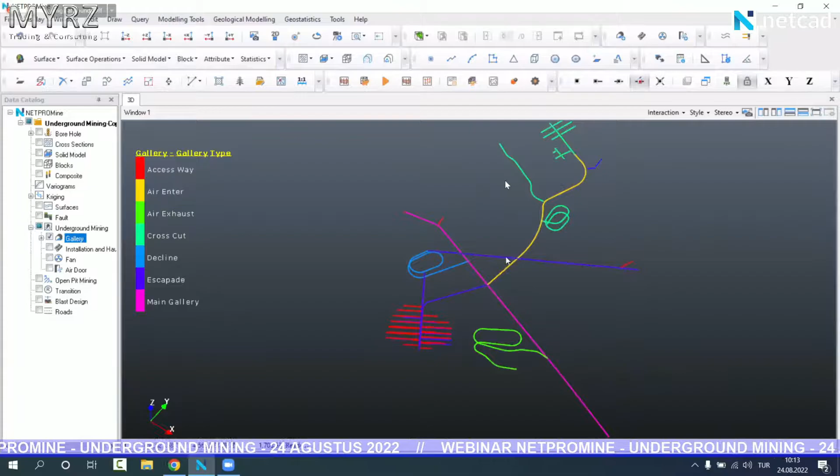So with the operations that we do today, basically we are going to create our own project, and then we are going to design an underground project. To start with, again, without anything, I just need to create an empty project file. I'm selecting my file. So it's going to be underground mining for webinar, or something like that. So I'm saving.

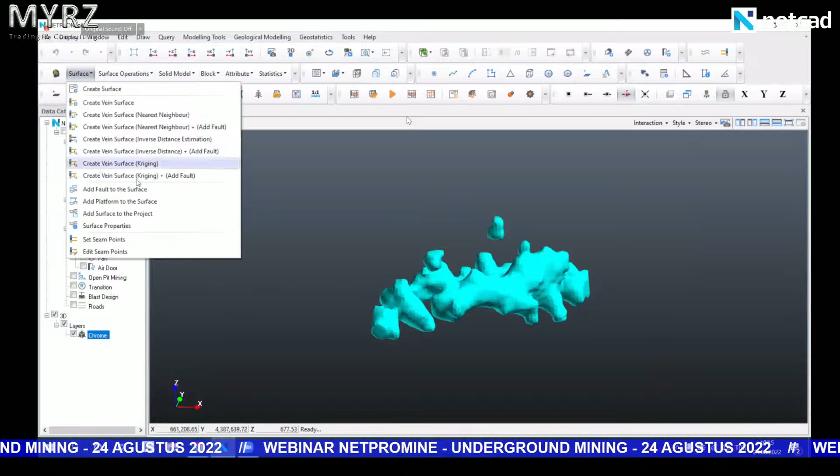Basically, you don't need to import any drillings, but maybe you can import a solid model if you're going to design on it. But underground mining actually works differently than the others. First of all, I'm just going to load one model here. Okay, so let's say this is our geological model. And I'm adding that geological model to the project as a solid model. So this is my solid model.

Because it's a chrome model, I'm just going to change the color. Maybe I can also see the borders, etc. And then I'm going to need a surface. I can also add the surface in here. And I can take that surface to the project.

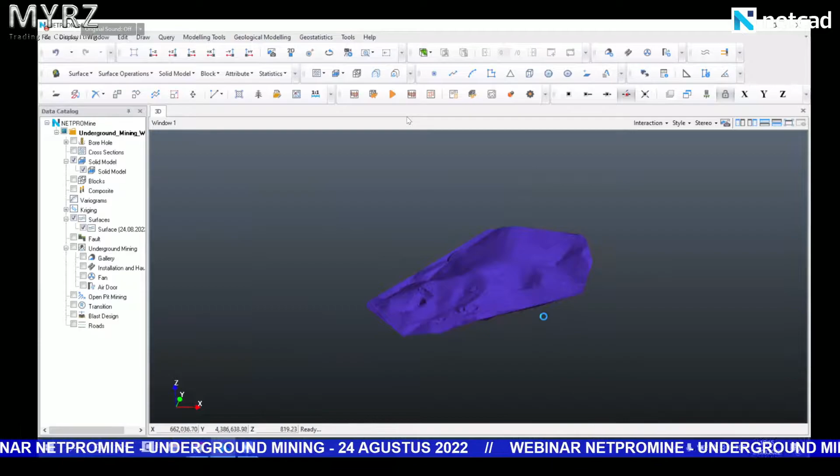In this part, those files could be DWG files. Surface, we can import the surface from an Excel file. We only need the points, X, Y, Z coordinates of the surface. And once we import it, we can work on our project on that.

So there are a couple of designs that I would like to mention in this webinar, because while we are designing underground mining, it's going to be more likely the lines. So we are going to work with the lines, and then those lines will become underground galleries. To start off with, maybe not from the surface, although I can make it a block model too, but I think that is not necessary at the moment.

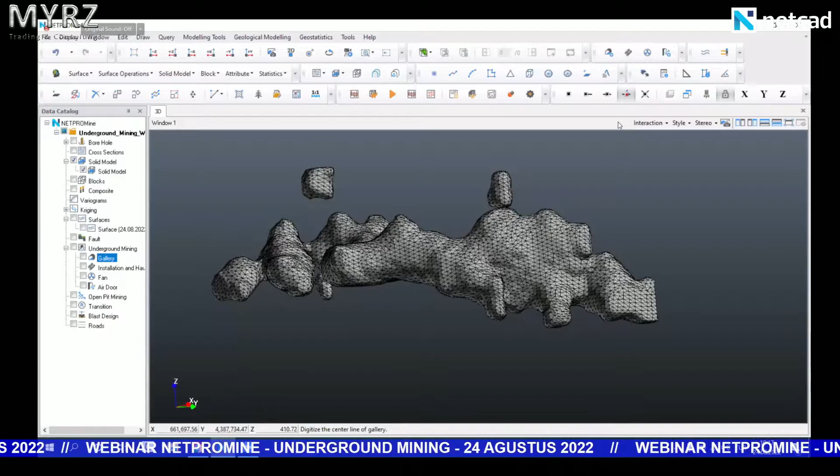To add a gallery, we simply right click, and from the list that opens, I'm selecting add gallery here. And now I can start drawing. In NETPROMine, there are snapping features, so it depends on where I would like to start. It could be a surface as well. So if I'm going to start the design from the surface, then I have to select the closest object and click some point on the surface.

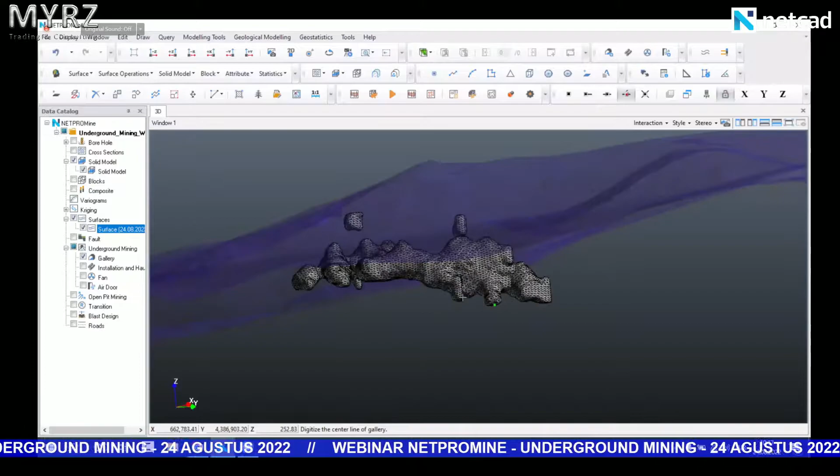But if I'm going to do another type of design, let's say I would like to draw my first gallery from the bottom of the model to the surface. So I'm selecting the bottom of the ore surface, and then the location on the surface, so the model and the surface. I just create one gallery.

To finalize it, I just need to right click. When we right click, we need to put some information about all the galleries. So it's going to be a lot of galleries in this webinar, that's why I'm just going to name it as G1, Gallery 1, Gallery 2. Or if it's going to be a curve, I'm going to name it as Curve 1 or Spiral S1.

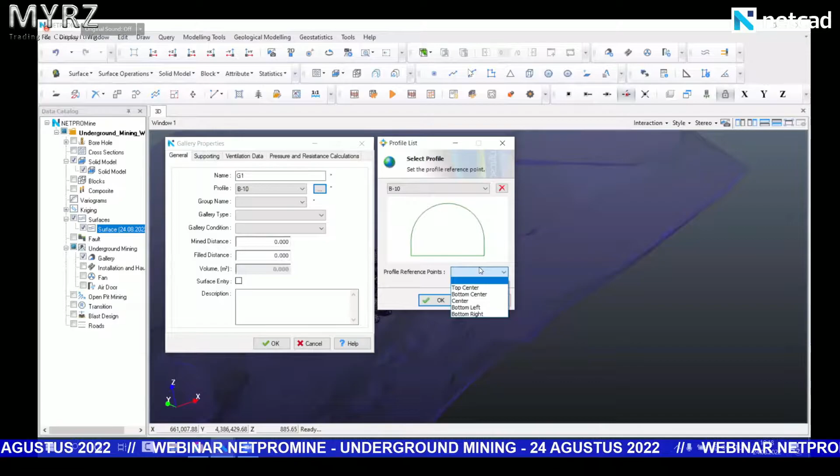And then the profiles. I need to select one gallery profile. I'm clicking the ellipsis button here, and there's a profile list. You can check all the gallery profiles, and you can select which one suits your project as well. And then there will be a profile reference points, so when we draw that line, where this profile will stand.

If I select, for instance, bottom center, my line will go through that point, and my gallery profile will be located on top of the line. So this is a reference point that we can decide, or it could be the geometric center of the gallery profile. But I would like to stick with the bottom center point.

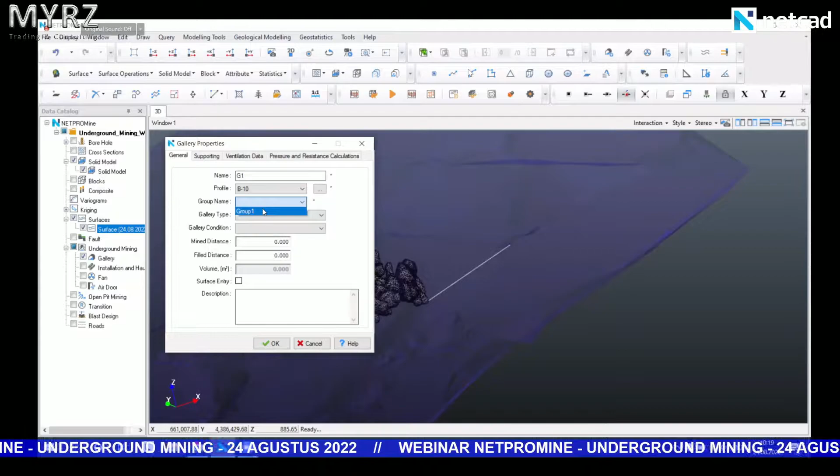When I click OK, I move on with a group name. You can create different gallery groups if necessary. We didn't create any other group than the default, that's why I'm capable of selecting only group 1.

As a gallery type, there's lots of options: main gallery, the haulage way, access way, air enter, air exhaust. There's lots of options. So I'm just going to select the main gallery here.

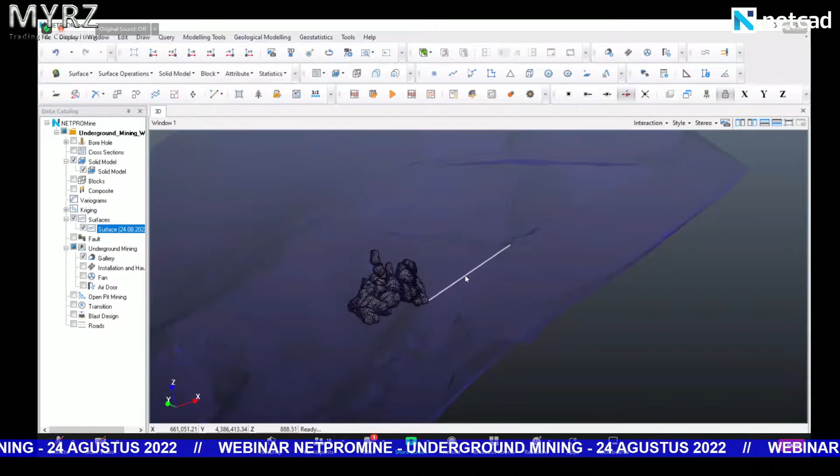And as a gallery condition, I can select planned, operated, mined, or filled. It's all the information about the gallery. And if it's mined or filled, then I can put the distance, so how many meters it's mined or filled. It's also additional information that we can add. Once we click it, now the line becomes a little bit bolder, but still we are not able to see the gallery profile on it. This still looks like a line.

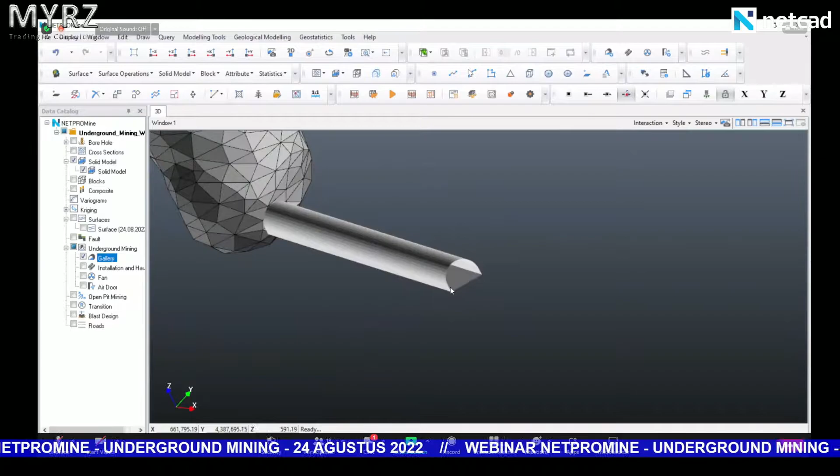To see the gallery profile, we need to right click on the gallery and uncheck that display center line. By default it's checked, so if we uncheck it, instead of a center line we'll be able to see the gallery profile. As you can see, our gallery is created with its profile on it.

This is the first thing while we are designing the gallery. If you are going to design around the ore, basically it has to be that way, but in this sample I will also use other techniques, so I'm not going to stick with the ore points. If you are going to use the ore body and build your gallery system around it, then we can use the snapping points, the surface, the geological model.

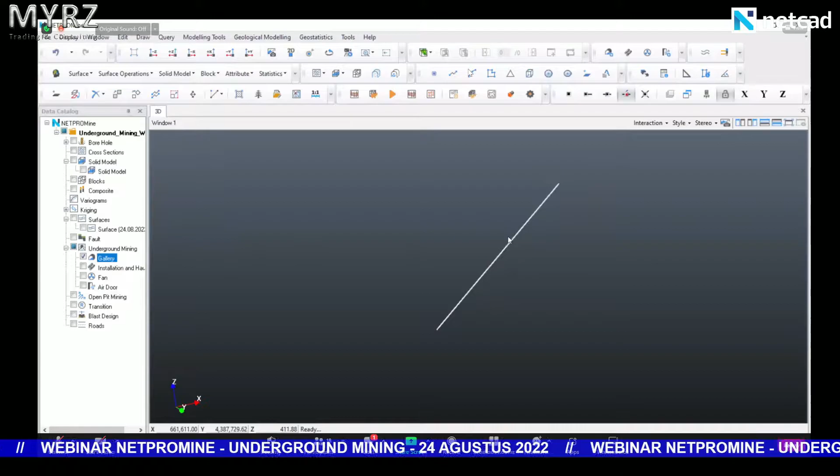Or if you would like to make a free design, let's say we select the starting point and later on we would like to move freely. I'm just turning that gallery profile back to display center, and then to add a gallery I'm clicking here. If I'm going to continue from this point, then I must catch that point. But if I would like to do some free design, I can catch the last point of my previous gallery and click the space button on my computer, or click the coordinate selector window. Both are basically the same thing.

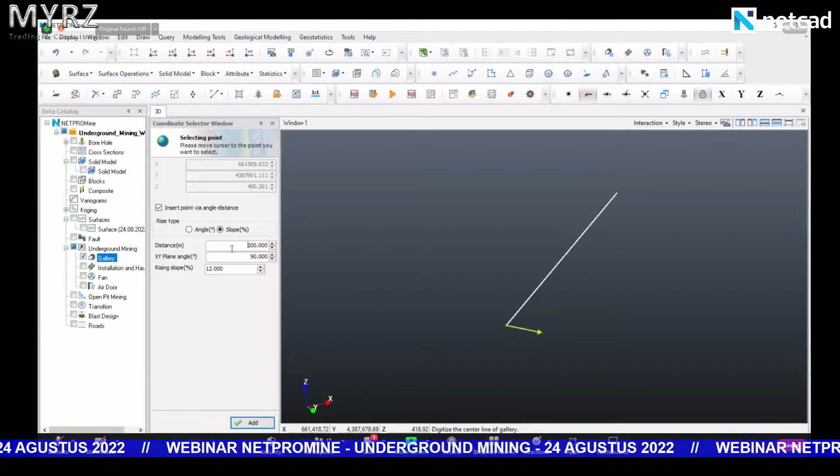With some parameter entries, we can create the gallery direction, how long this gallery will go through, and the angles. For instance, there are some parameters already on it. I'm just going to display that. So the distance, how long my gallery will be, and the XY plane angle is basically the angle I have in 2D dimension.

2 dimension. So instead of 90, if I select 180, it will go left side. If I select 0, it will go right side. So 360 degrees we have, and we can manipulate that line drawing with those features. I think 90 was quite okay for my project.

And the rising slope, this is the amount of - it could be a percentage or the angle. So 12% slope we have in this design. If you're familiar with road design, basically we design the road with an 8% limit, so 8% is the maximum amount. If there's some limitation in the underground design, then you can put that number as well.

So let's say 7%. The distance is 100 meters. If I use 7% as a rising angle, then that means from the starting point to ending point we'll have a 7 meter elevation difference. This is the percentage one, but the angle one is different - angle will directly create a 7-degree angle, and my gallery profile will go through that. So rising slope could be different.

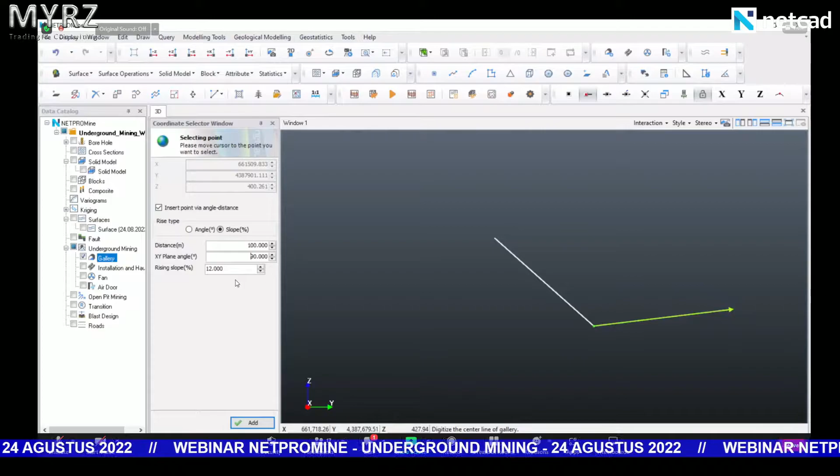If you would like to go the other side, then we can use minus 12 for example, and it will go down. This is the free design - after selecting one starting point, you can make your own design according to the criteria you define here. I'm just going to add that. Once I add it, it becomes white, and I did draw my gallery line.

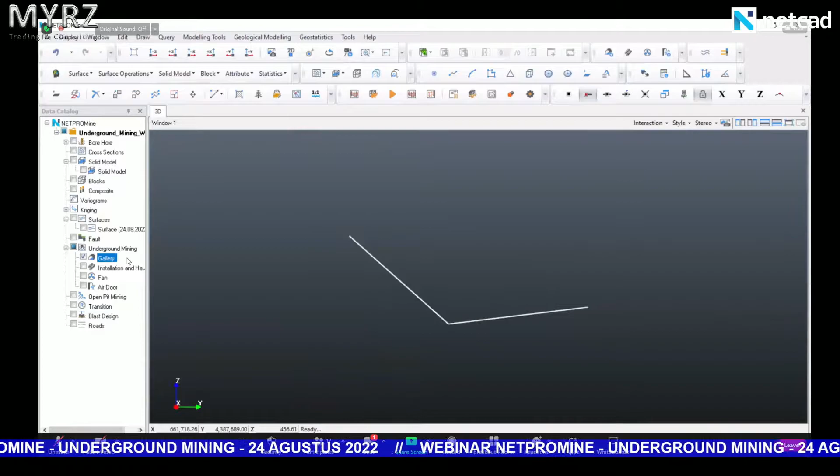With a right click I can complete creating this gallery. That's why we are going to put or draw lots of galleries. I'm just going to select the main gallery and the first ones that open. So quickly I select that information, and then when I display the center, I can see that my other gallery is also produced.

Basically it's a line drawing, so as long as you draw the lines according to your design there will be no issue. And also by using the coordinate system you can continue drawing the galleries. Let me also show you that. So I catch that point again to show me the first.

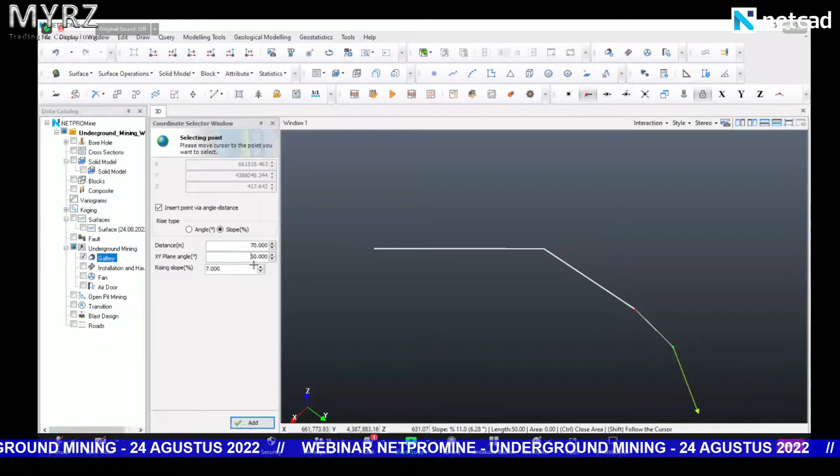So I can continue directly, or in this one maybe I can change the XY plane angle, like 80 degrees, or the rising slope, 11%. The distance could be 50 meters. So I change the parameters and add it. I can continue adding other galleries - now distance going to be 70, XY plane angle will be 60, and the rising slope let's say 7% again, and adding.

So I add two different lines that have different directions, different distances, and different plane angles. When I right click, I will use those two broken lines, or one polyline as we can also call it, and create a gallery profile as well.

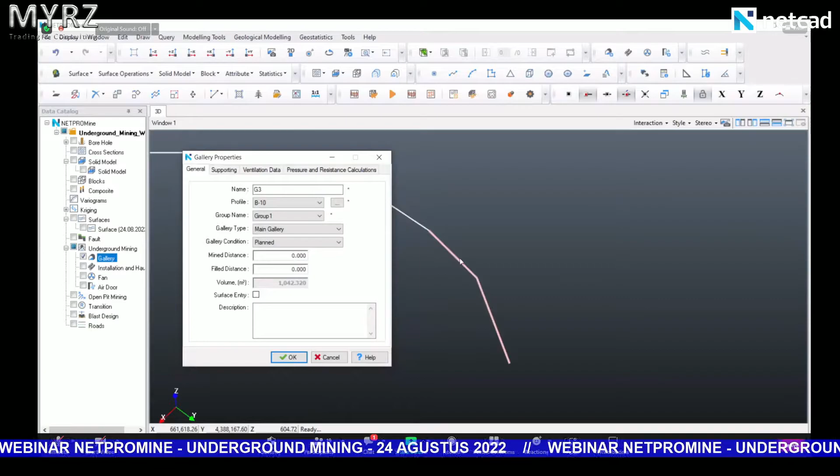So this one is going to be my third gallery. If I check its object properties, as you can see, the highlighted one is the broken line as a gallery. That was basically a free design. So if you would like to design freely around the geological model by using the surface information, and if you would like to design your gallery in here, then you can use those free design options.

The second way of doing this, it's not going to be the same data or same location, I must say. I'll just delete those galleries. The other method is adding some reference points. So I do have a CSV file that contains some locations, XYZ locations. So I know now which coordinates I can use. And I do have the elevation information in here.

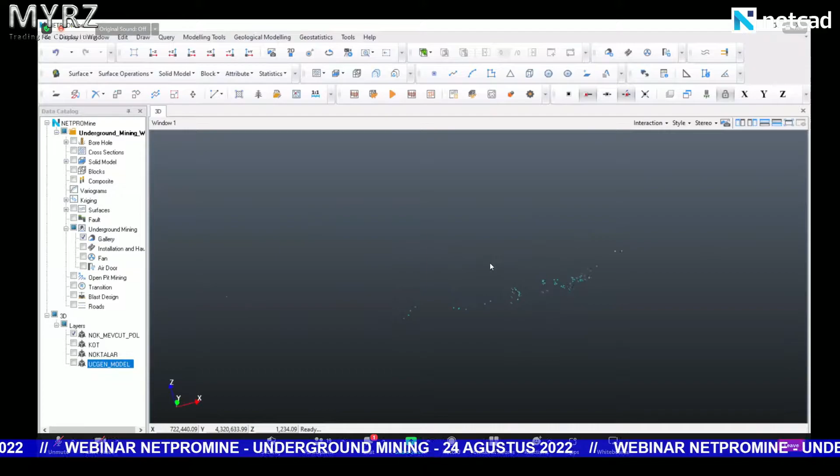By the way, that information could be either CSV, an Excel file, or a DWG file. It doesn't matter. I can also add some points by using the DWG file. So those are the points that I'm going to use, and I added the points as a DWG. But it is also possible to add files in CSV format. For that, I need to decide the layer name. I need to select the separator, and then, okay, so the second column is this one, the first one is X, and the third one is the Z column.

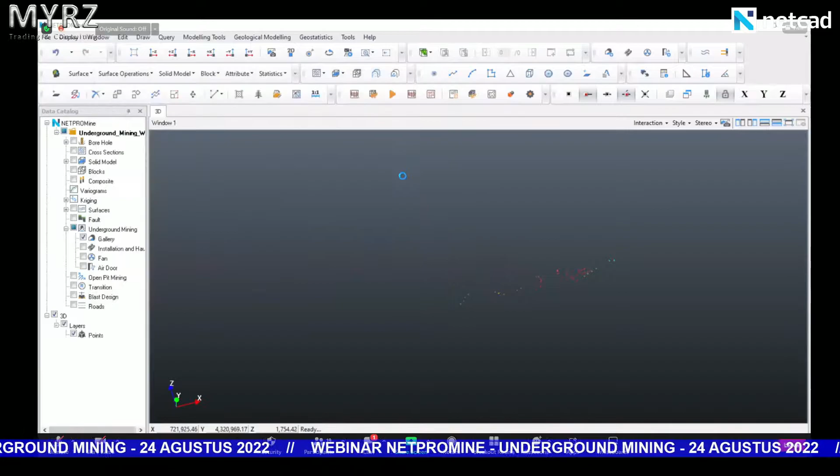When I complete it, I'm going to have all the points, and also I visualize the points or thematize the points according to their elevation information. One other thing that you can do with the points is basically label modes. So I select Z coordinate. When I click apply, I can select a label.

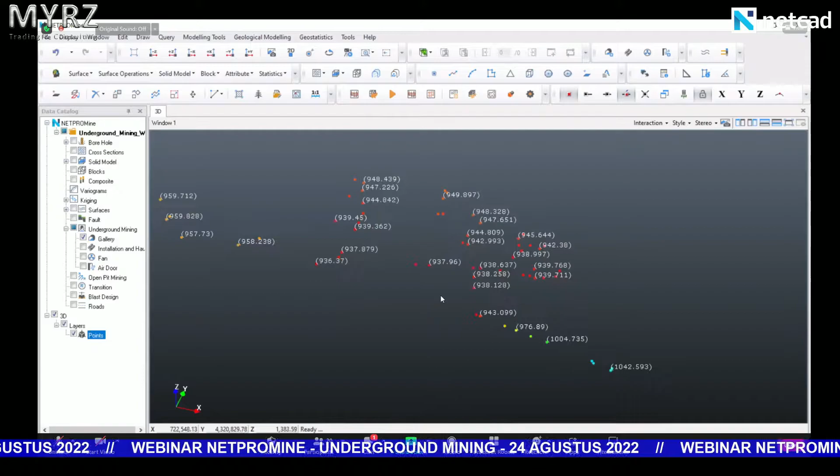Maybe the points are quite small for you to see. That's why I'm going to change their style from the advanced settings; I'm going to give some thickness to the points. So I think it's better now. And also, I'm capable of seeing their elevation information from the beginning with that. This is if I have the reference points. So this design will be according to the reference points. But the operation is quite the same. Reference points just help us to do the design even quicker.

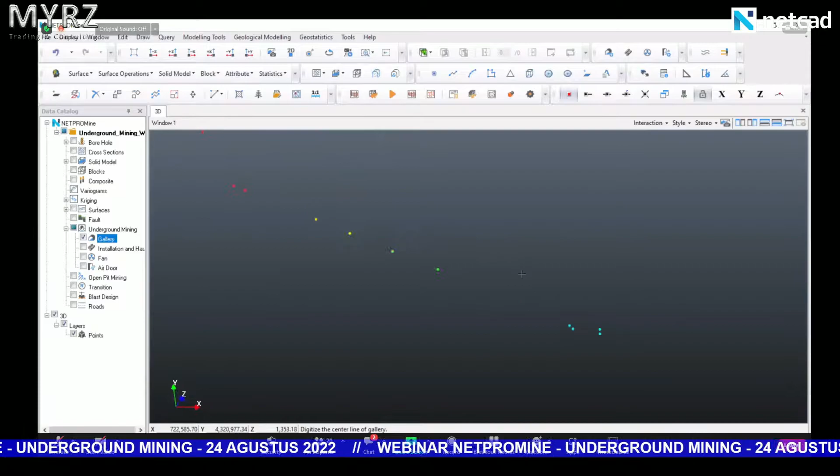From the gallery, I'm adding a gallery again. Because I'm going to select the points, as a snap feature I need to use the point snap, especially. I will skip some points. I'm not going to use them. So let's start from here. Okay, here to there. So this is one gallery. G1. Okay, I created my first gallery by using points.

And then I'm adding another gallery. So I'm capable of seeing its elevation as well. So slowly it's rising here. 38 and 43. There's a 5-meter difference between those points. If I would like to, I can also catch the point by unchecking the gallery and then catch the other point. So this is my second gallery. So gallery 2. And I create the other gallery.

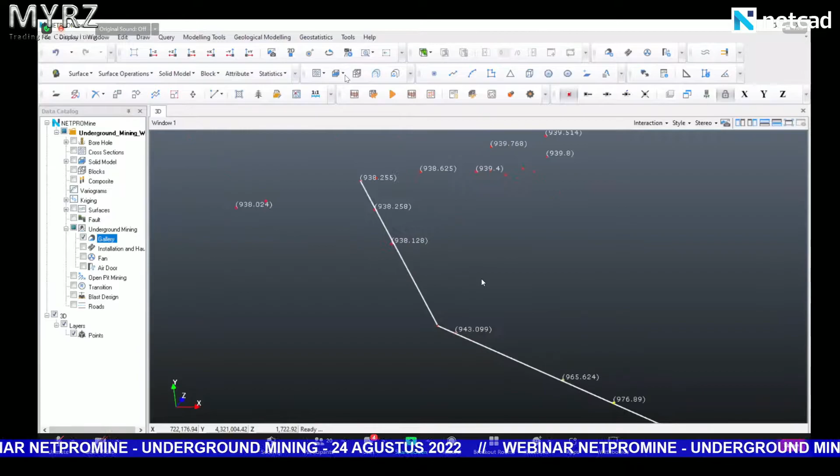Also, now in this part, you are able to see there's quite some elevation difference. And suddenly that gallery profile is going high. So simply I can add a curve in between those gallery profiles. The radius information, I don't know. I will try with 90 meters at first, 10 angle steps. I will select the galleries and it will create the curve for me.

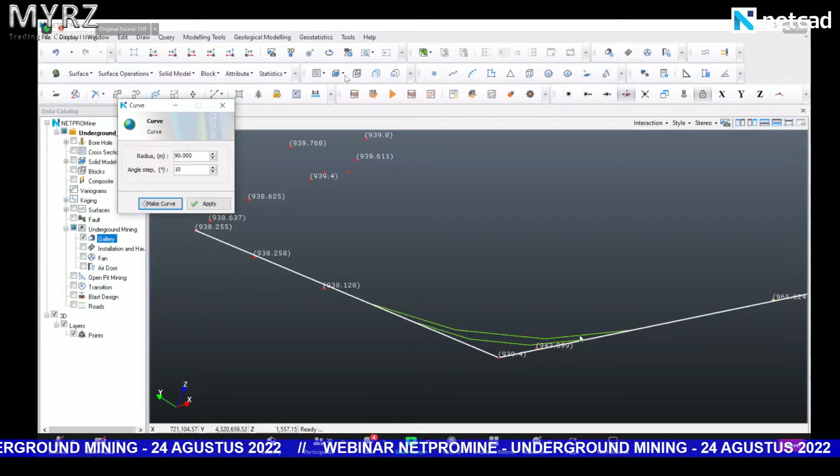If that curve is enough for me, then I can keep it, or I can simply change the radius, sorry, and I can select those galleries again. So the second one, if I would like to use the second one, then I have to click apply. Once I apply, we are also going to give some information to that curve as well. That's why I'm going to name it as a curve. So curve 1, the profile will be the same as the rest of the galleries. Group name, gallery condition, okay. So I'll add my curve.

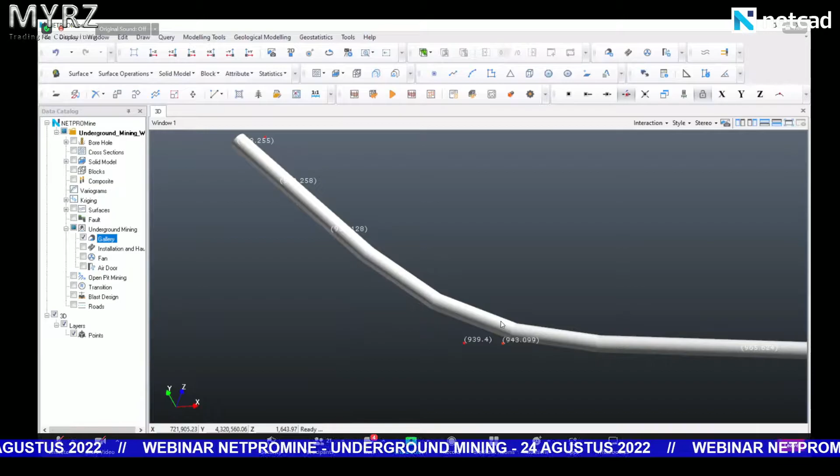Let's check the gallery profile as well. So now I'm seeing my gallery profile and it's quite a smooth walkthrough. There are some step angles in the curve actually. If you increase the number of steps, then it will divide it into more pieces and it's going to be a much smoother transition in between those galleries. But this is how we add the curve for this design.

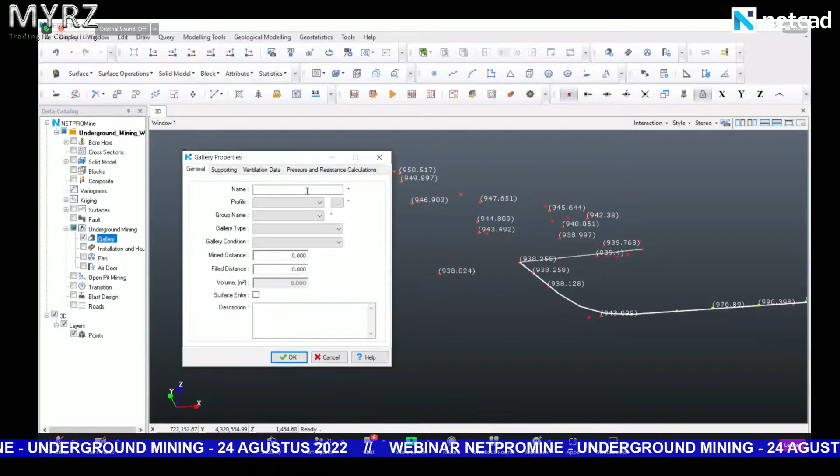What else can we do? Basically, if you have the reference points, designing a gallery is quite easy, much easier than freestyle design. I'm just going to display the center line, and I will add a couple of galleries quite fast. So let's say this is the third one. Okay, adding another one. Four.

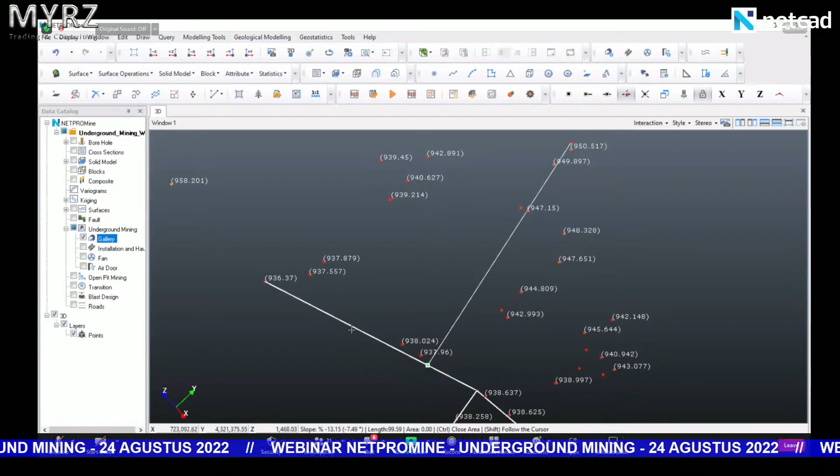During the design, basically you can also edit those lines because, like I wanted to explain before, it's line drawing at the end. For instance, I can add a gallery, select one point from here to that point, right? But if I select closest object, even if I didn't design it previously and I would like to connect those galleries, I can select one point on my existing gallery. And then I can combine those galleries.

It's going to be a G5 profile and so on. Yeah, I connect one point, one elevation to the other gallery. I basically design a new gallery. It's just a line drawing, or I can edit those galleries if I wanted to. So let's edit.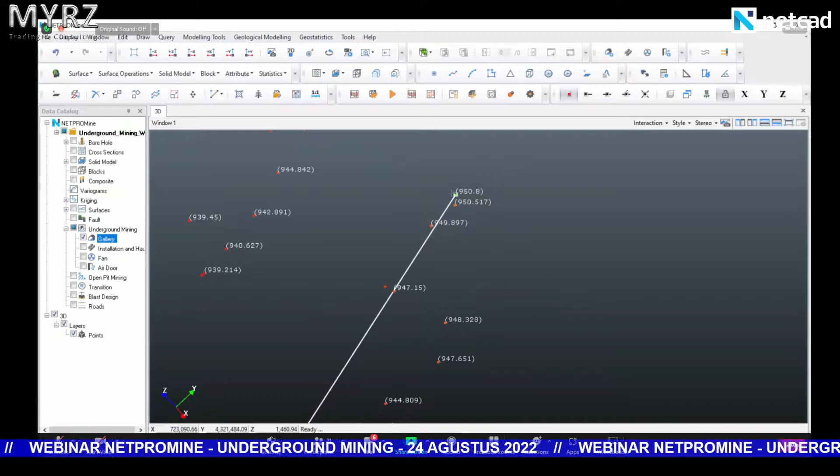So I wanted to change the starting point of this gallery instead of that part. Maybe I would like to change the starting point to here. That's why I'm selecting the point snap. I change its starting point. Whatever I can do with the lines, I can also do with gallery profiles or gallery axis. In this regard, the gallery design is quite easy in NETPROMine.

Without taking too much time, I will just add a couple of galleries too. So let's add this one. By the way, you can select multiple broken lines and add them as one single gallery. So this one is gallery 6.

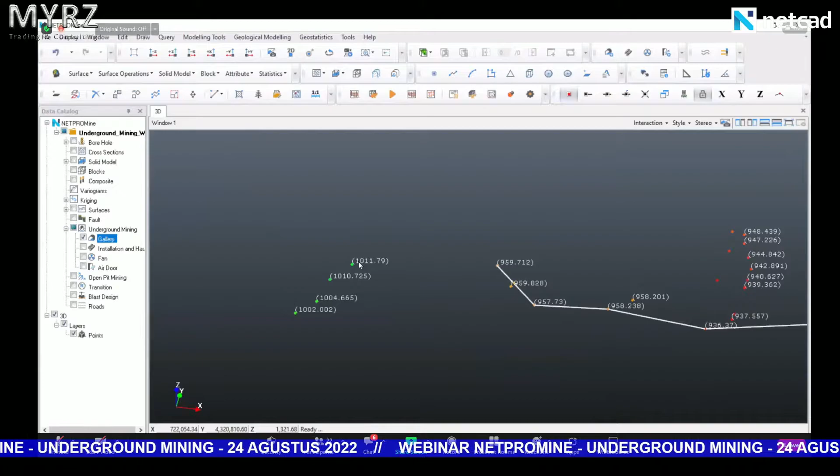What happens if we have quite some distance, some elevation difference between points, and we would like to go to that elevation, go near the surface? If we draw a direct gallery, it's going to be almost like 45 degrees. Let me show you. So if I select add gallery and one point here, one point here, the slope is quite high. If it's not acceptable,

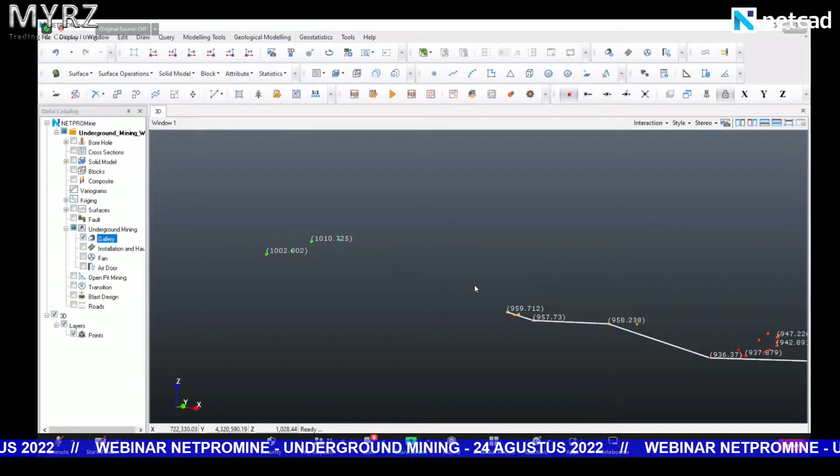then in such cases we can also add spiral designs. All I have to do, again, is do the selection, the starting point and ending point, and right click. Once I did that, now I'm deciding the slope percentage. Like if it's 100 meters, then it will go 8 meters higher. So according to that slope percentage, 8 meters in every 100 meters, we are going to design a spiral. It's going to be a long road, but with the proper slope angle, I will be able to go to that location.

It's a percentage. Radius is important, but there's another option. So if you are going to end the spiral here and you select, let's say, 200 radius, then your spiral may not end here. It might go further. If you say end spiral at the points, then the radius selection is not that important. And then we decide in which direction the spiral goes, how it turns. So if we say clockwise, it's going to turn this way, and which side it will start. I can't show it without doing the selection, but it will start on the left side or the right side.

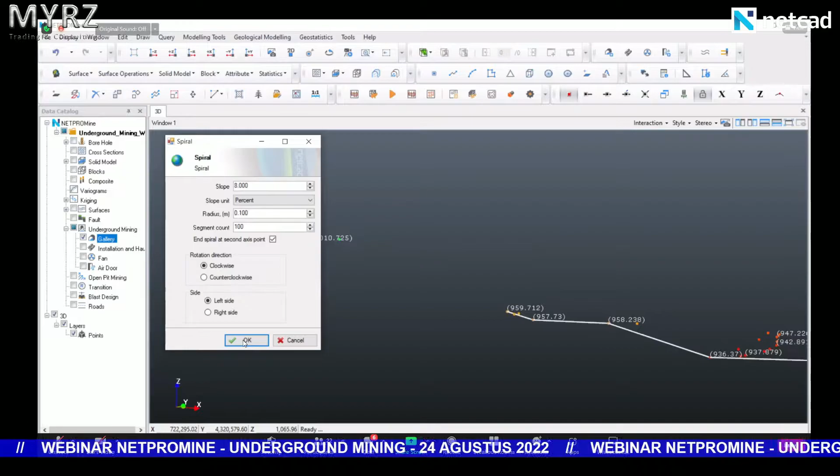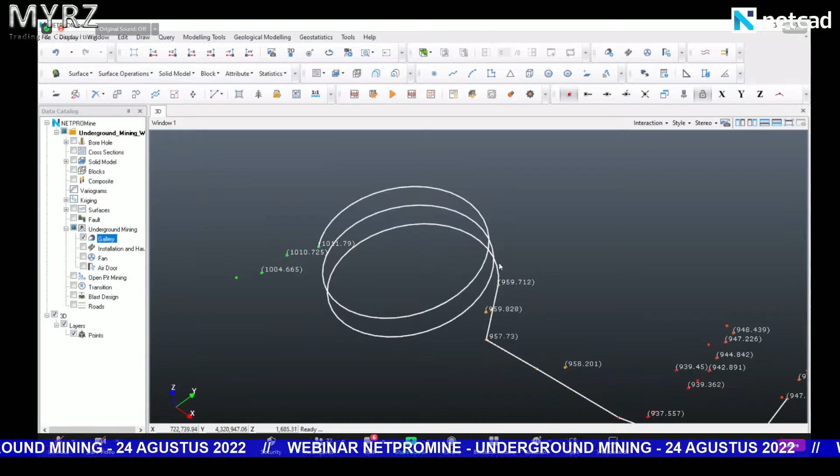So we just need to check that information. If it's not the way we want it, we can change the parameters and create that spiral again, because we do have the reference points. I'm just clicking OK. Now I need to put the information for the spiral. It's going to be a spiral, that's why it's S1 as a profile, and other properties. I just select it and add my spiral. As you can see, it started from the left side and is going up to that elevation.

Now let's also see the gallery profile. Or you can use both methods. For instance, we do the spiral design and we would like to continue from that location. So we are not going to go there, let's say. Then I can add a gallery. I can catch that point, click in the space, and see where that line goes.

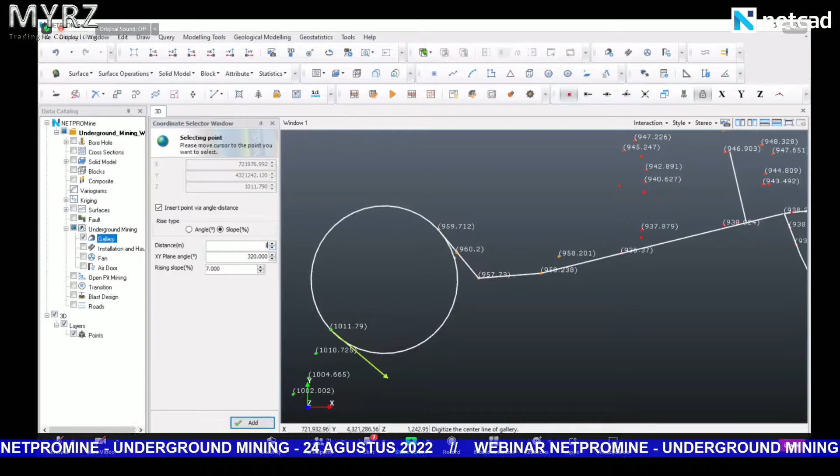So when I check the XY plane angle, I can make it 0. So it's going to be 270 and maybe 320. Yeah, that one looks okay for me. Distance 100 meters, and the rising slope, if I check the distance from that direction, I can see. So 8% we use for all the spiral design. I can continue doing that, or maybe just remove the rising slope so the gallery can go directly. As a distance, maybe I can increase it.

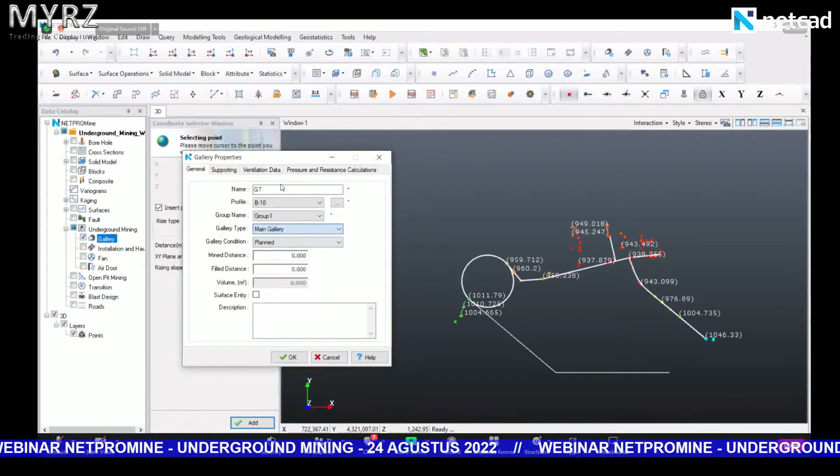So I can add that design. Then maybe change the angle. I can add another one, and it goes on. So both methods are available. I am not sure which gallery we're adding. 7, I think. Yeah. So we add that gallery too.

According to the points, we can do that design. As I said before, gallery design is a line design. So that's why I can right click and edit the gallery. So the gallery looks that way, but I can delete that point as well in between. So it's going to be a single line at the end. It's just a line design.

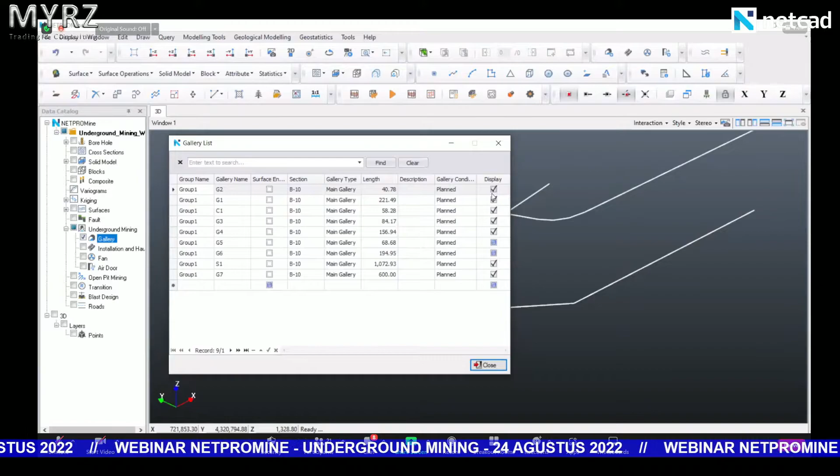And there's also a method to add the lines as a gallery. I will show that too. But I would like to go on from that project for a while. What else we can do? The gallery list. We can select either we would like to show the gallery or not. We can check all of the gallery's properties.

So I can see that G1, G2. If the gallery name was different, so let's say I skip selecting G7, I could have added the gallery name later on. I can find the gallery that I wanted. There's a searching tab. So I can see almost all the information about the galleries. There's another one.

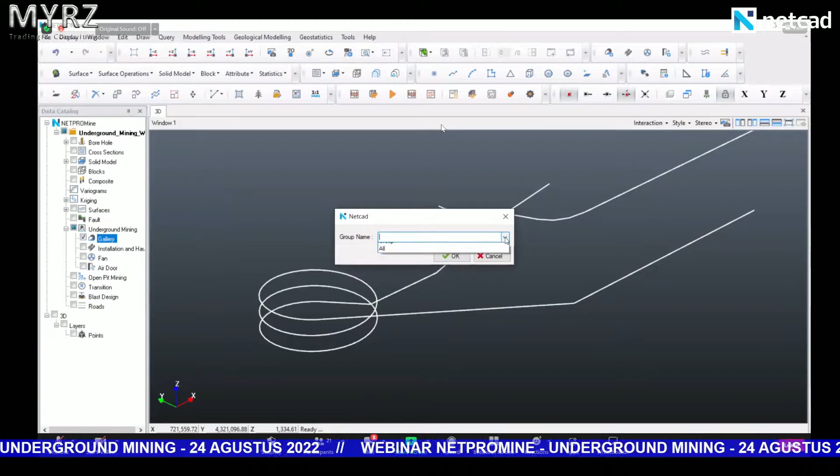The reports. At the end of the design, when we get a gallery list report, we can get all the detailed information about the gallery name, gallery profile that we use, the type of gallery. Basically, we select quickly the first thing as a type, but we can make differentiation, different gallery types we can use. We can show its difference, the condition, the length, slope angles.

For example, I can check this gallery, the slope angle of this gallery, the G1 is quite high, for example. I might edit its slope. And I can turn back to the design. Its circumference. Length of this gallery. We have the area of the gallery profile we have. So we can also learn its volume too.

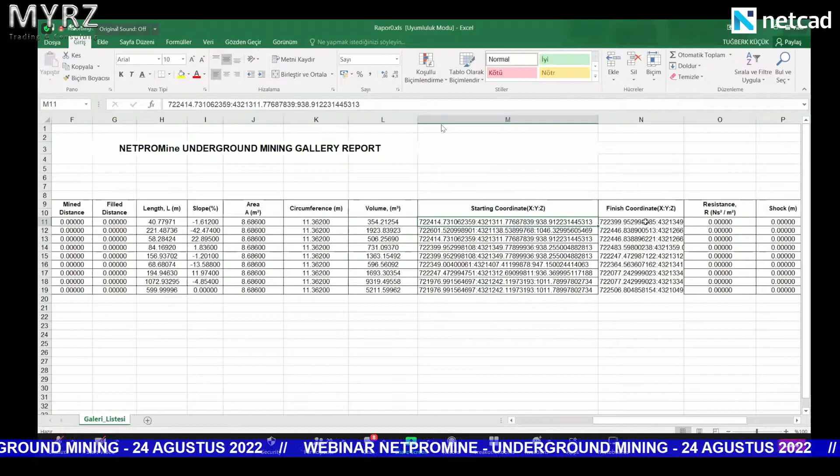And gallery starting location as a coordinate. I have finish point, ending point as a coordinate. If there's a shock airflow, we can also see it in the gallery report. And later on, we will add a couple of things to the gallery. Okay. What else? There's a profile option.

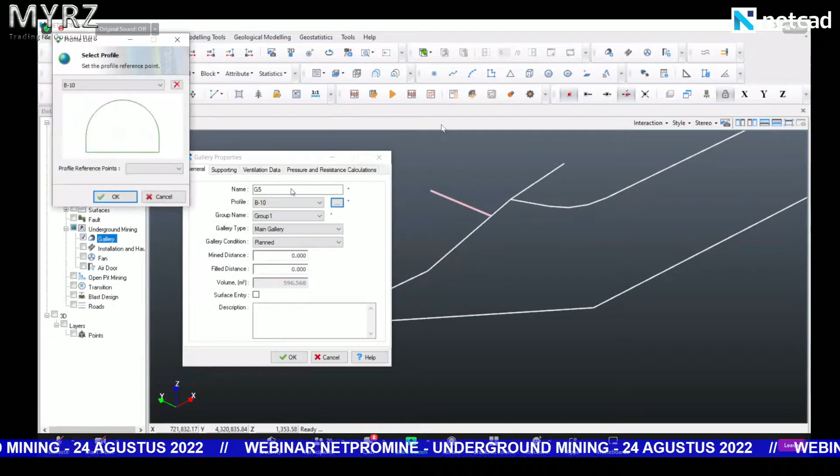We were using, let me also show you. If we select the properties of a single gallery and we click the profile list, there's only the profiles that we have in the library. So the user should select one of those profiles to be able to design. But it's also another option that we can add our own gallery profiles, which I'm going to add one file.

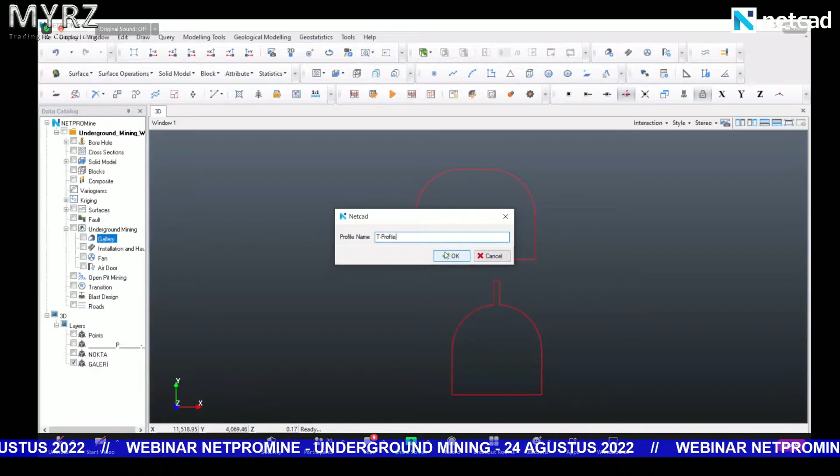Okay, I add some other layers, and I think that was, yes, that was the gallery profile drawing. So it looks like what I'm using, so I'm not going to use that, but I would like to add this profile into my library. I need to use select profile. As a profile name, I'm going to say T profile and click OK. So there is no need for that information anymore. I can turn back to my gallery.

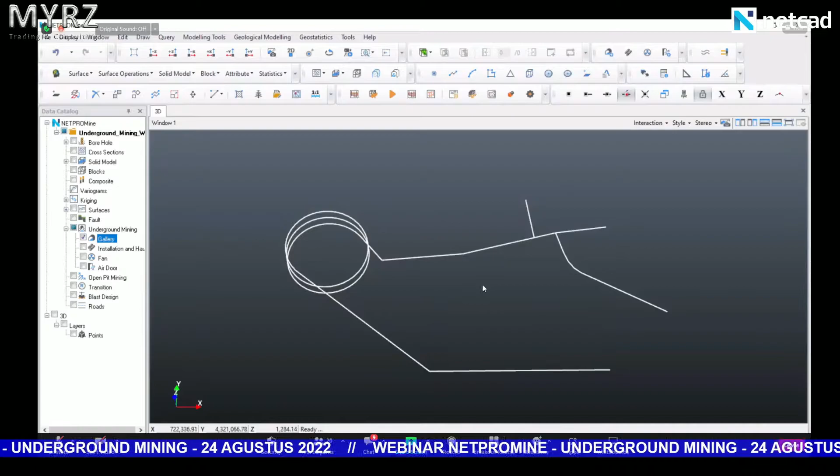And when I click object properties of any gallery, I can see that my profile that I recently added is here. I can select its center point. And if I do that change, it will also update that gallery. So let's check. Now I'm going to show the gallery profiles. So you can see the hat, I'm going to say, you can see that hat on that gallery, but the others, we don't have it.

And when we get the report again, gallery list reports, it automatically updates the area of this gallery. And according to that, volume information will also change. So whatever changes you made, it will be updated.

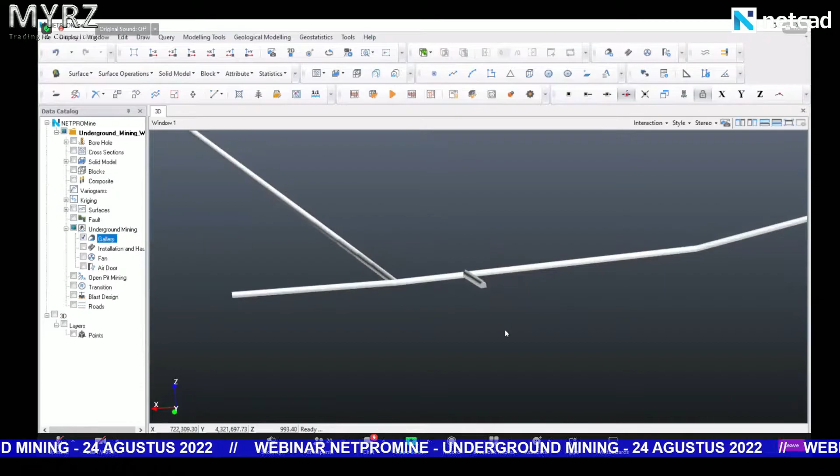You can just click object properties of the gallery, and you can change the profile, or you can change the information. You can make some adjustments on the project. I will just leave that like this one. So what else in the design we can do? There is an option to create a surface.

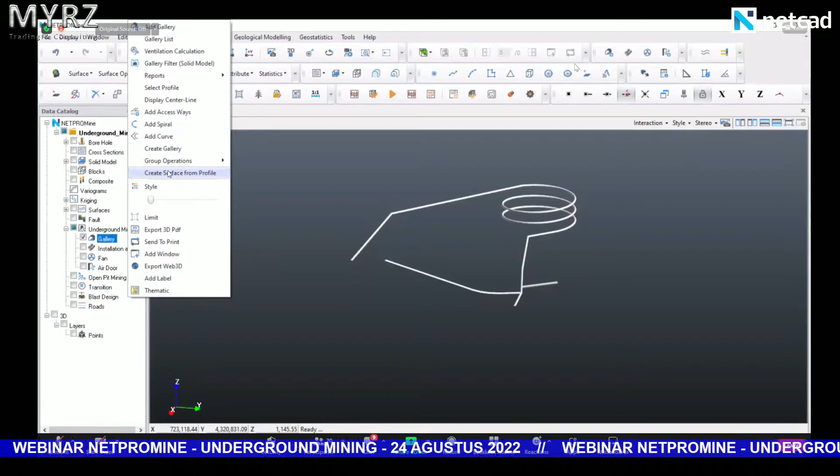So if you would like to just share that file with your colleagues, and you don't need to edit the design anymore, then you can simply save it as a DWG too, or you can send that like a surface file. So I will just show how to create a surface file. When I do that, it asks me, would you like to save as a different layer? What it does is saving all the galleries separately. If I click no, I will just create gallery,

and it's going to be a surface file in our software basically, but you can save that gallery design as a DWG, and you can see which layer we are saving as a DWG. So it goes underground mining webinar project, the surface layer, surfaces, and gallery. So we can save entire gallery design as a DWG file. Or if you would like to save separately, then we can say create a surface from gallery profile as a different layer. Yes. So instead of gallery, it will create all the galleries in a different layer.

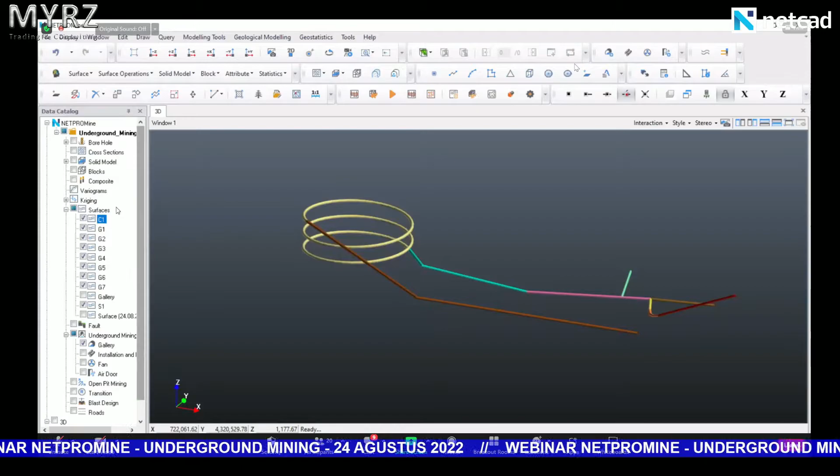It's also an option. Okay, I'm not going to use the surfaces for a while. In the gallery design, to create a group, you can create a new group, and you can change the gallery groups, or from the beginning, if you do that, it's going to be much easier. So you can manage the galleries with a group. Yeah, I think that's fine.

Right. There's also some style, thematic operations. You can change its color, or you can thematize according to the information. I will talk about it after we do the installation part. And the bar that we can use under the style is always giving the transparency to the design. So it can also be useful.

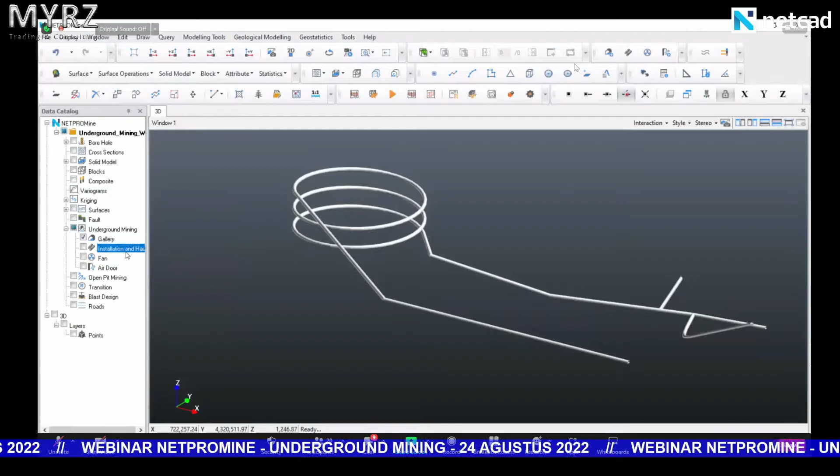Moving on to the installation and haulage. So as a sample, I'm also going to add an installation. The software tells me it's like adding a gallery. Then I have a mouse cursor set in a different shape. It says digitize installation. I need to digitize the installation line on the gallery. It can also be a center line, so it's going to be much easier for me to digitize it.

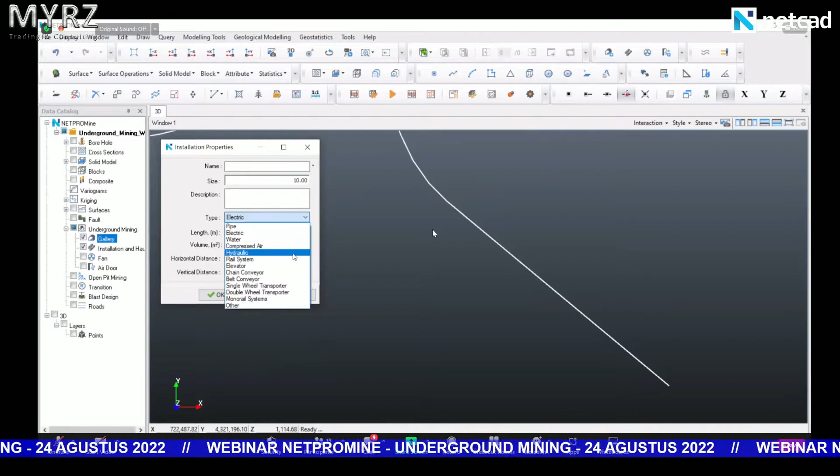So let's say in here, we have some installation. It's going to be the installation name, installation type. So it could be installation or haulage. The electric installation, the water installation, hydraulic rail system, whatever we have inside that gallery, we can digitize it. And as a name, I'm using E1. So it's going to be an electric network in here.

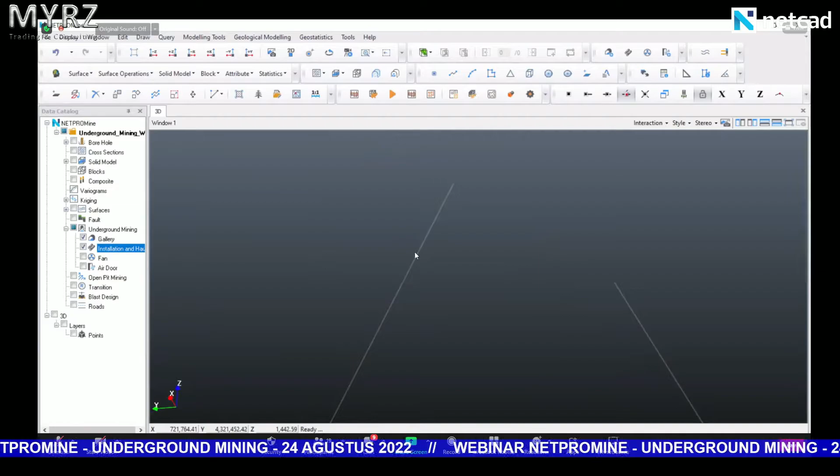We couldn't. Electric again. All right. At first, I think I misclicked somehow. So this is my electric installation. Now I can see that I added some installation on the gallery profile. It could be an electric. There could be other installations as well.

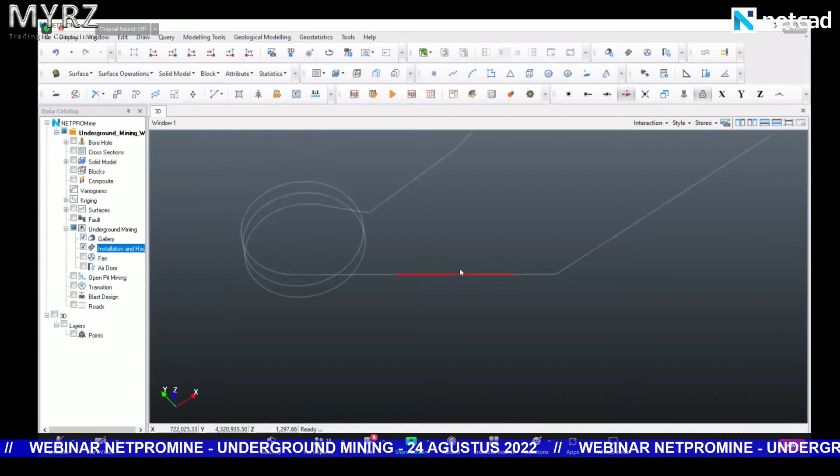Let's add another one in here, for instance. Right click, and this time water type of installation, or W1. So it is the water installation. I'm going to show the gallery profiles as well. Because I have the transparency, I can see the line that goes underneath the gallery profiles or inside.

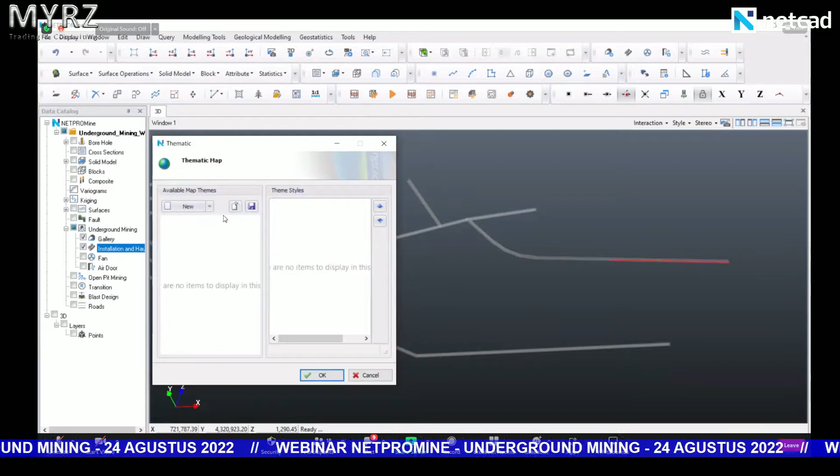If I want, I can also use thematic operations on those installations. Let's right click and go to the thematic operation. We would like to create a new thematic display. That's why we click here. So if we would like to make a thematic according to some numeric information, like distance of the installations, I don't know. I only wanted to show which installation belongs to which type. So it's a name.

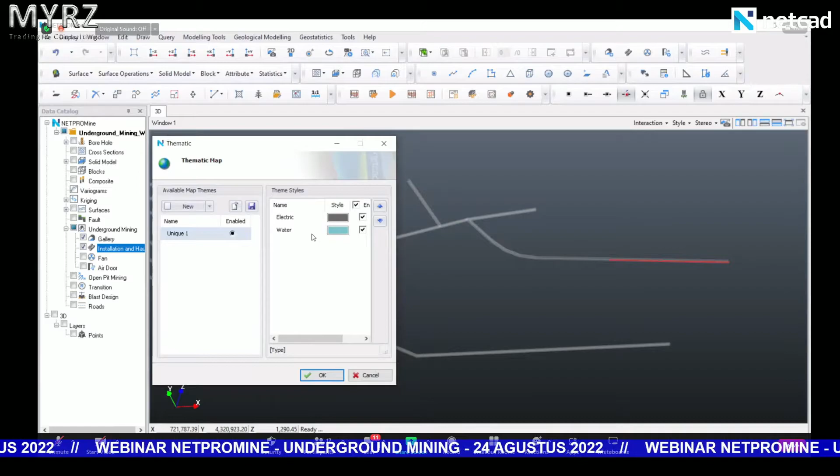That's why we are going to use the unique thematic creation. So non-numeric information we will select. So the name or type. I also have different names, but type directly comes. So as a type, whatever you choose, it will separate the information. The water, electric, the pipeline, hydraulics, whatever you have. So now we separate that information.

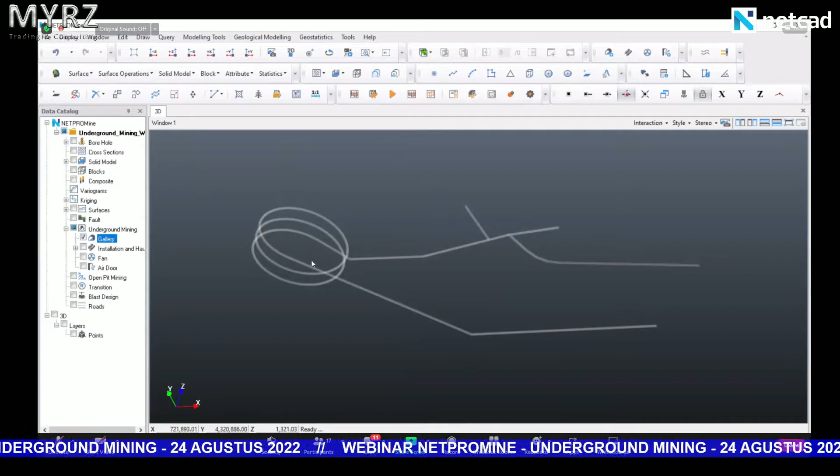But I would like to use different colors. For example, for electric, let's select yellow. Water actually looks okay, blue, but let's make it that one. Okay, so yellow for electric, blue for water. And I create the legend for that. I can add as many installations as I want, and I can make thematic operations. Also the same for the gallery. Like I mentioned before, we can do the thematic operation for the galleries as well.

So I select the thematic. What do we have different for the galleries? I think it's just a gallery name. Gallery types, we selected main galleries for all of them. So gallery name will be different for each gallery. Let's make a thematic by using that feature. So the C1, regular galleries, the spiral. I can choose a color range. I can use the rainbow colors in order. So it will assign the colors to the gallery profile.

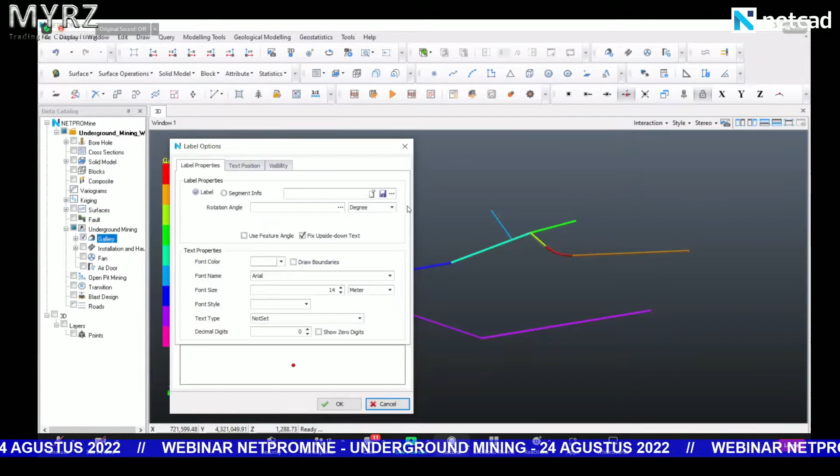I can add a label in the very same way. So when I select add label, I'm using that ellipsis button over here. Again, according to the gallery name, I'm adding a label this time. I can change its color. I can change its style. I can make it bold or italic. The font size, I can make it larger or smaller.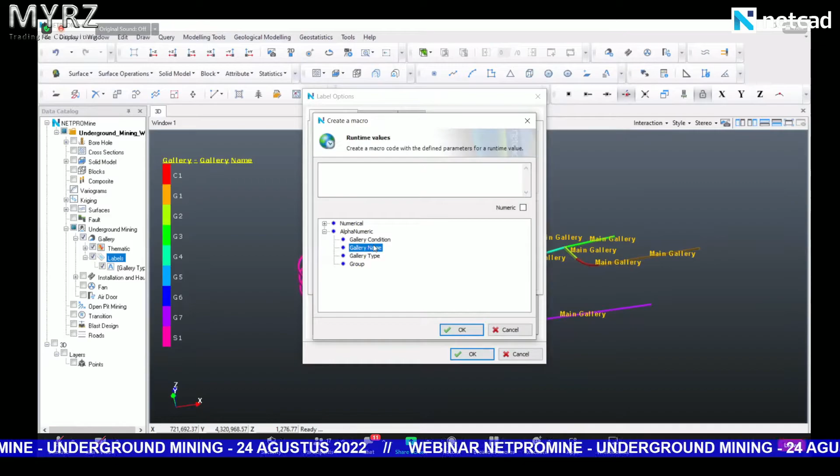Oh, we didn't use the type. We just need to use the gallery name. Sorry, gallery name, and then yeah. So now I can see the name of the galleries on the galleries as well.

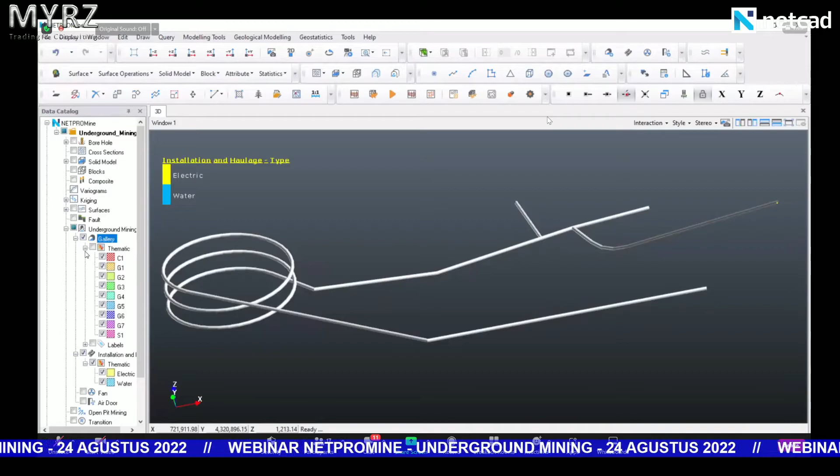So what else? What else can we talk about? So, thematic operations: we can show any information that we desire on the galleries. We can thematize the installations as well. If we don't want to see the thematic of the gallery, let's say we would like to see the installation inside, then we can remove the thematic information of the gallery, and we can increase the transparency of the gallery again.

It's all about managing the information. As long as we give the right information to the gallery, or we use the reference points, there will be no big mistakes in the gallery design as well, and our job will be much easier.

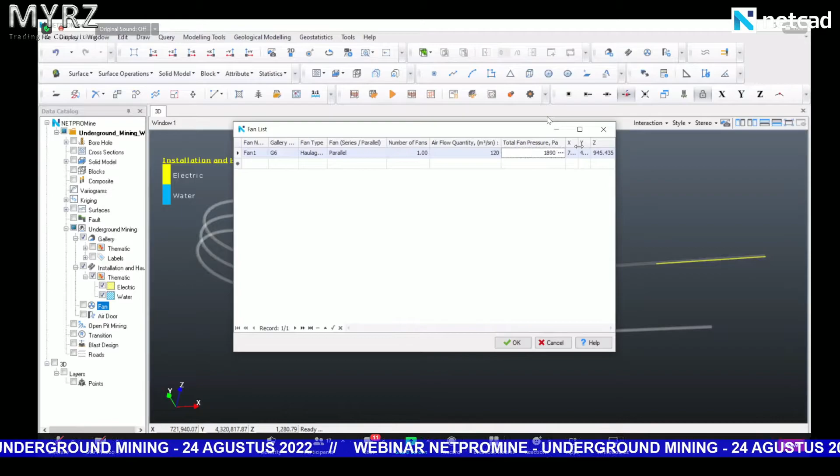Moving forward to the fan, we can add a fan on a specific gallery or galleries. Let's add a fan in this gallery. We need to select a point for that, and I'm selecting a point. So the fan type, okay, haulage, parallel, 1, airflow. So it also calculates the total fan pressure and gives me the coordinates of the fan where I'm adding it.

So once I add the fan, it's going to be displayed on the gallery, and it will have an icon on it. It's quite the same with the air door. If I add an air door on a specific gallery, let's select this one. Type of the gate, steel, shock resistance, I just put some numbers on an air door, and here is the first air door that I added.

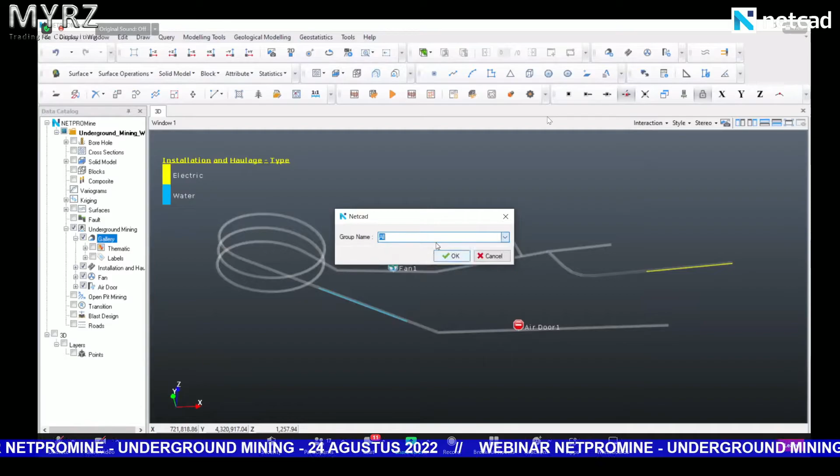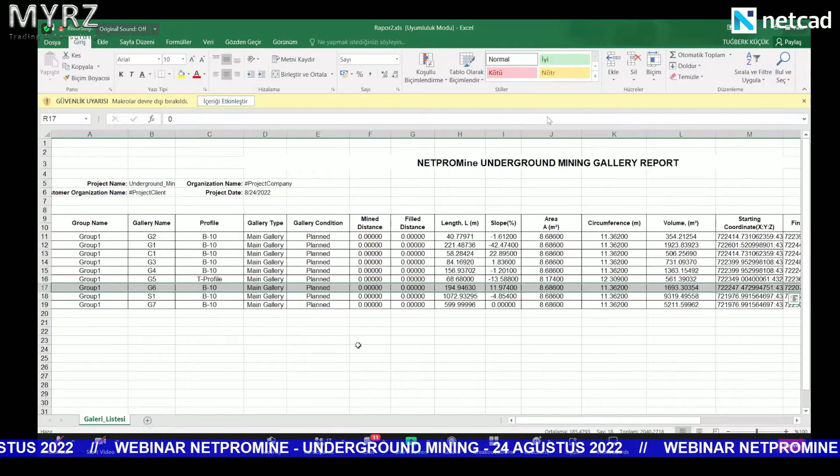Now when I get the report, the gallery list report, I'm going to see those changes as well. The T profile, that was our first option to change one gallery from the others, and later on it changed the area information. Now we do have airflow on one specific gallery here. So with the changes that we made, we also change and update the project.

Okay, that was basically design using reference points. There's also another way to do it, and this is the last one. So I just delete the points. I'm not showing the galleries at the moment. And when I go to my data set, I think I also have the access. And it's a DXF, DWG, DXF. It's all okay for me.

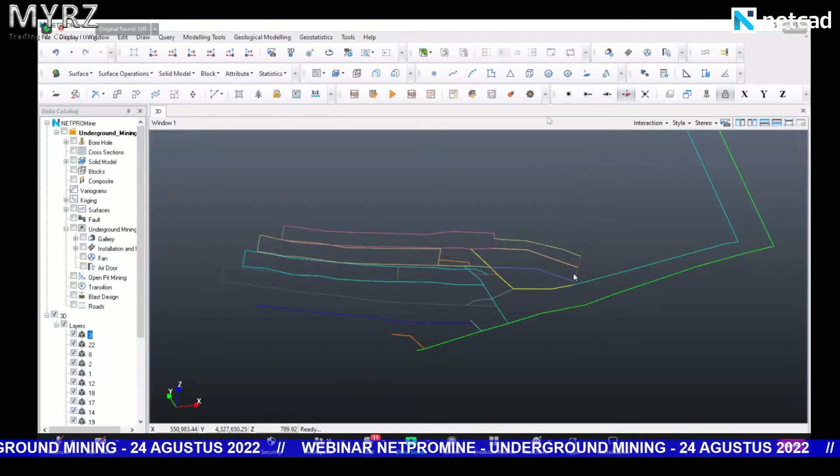It is a much more practical way if you already have a gallery drawing like this one. So if you have the lines, maybe you digitized them in another CAD software too, it's okay. We can take that information and we can save those galleries under here to manage. For this, we right-click the gallery. We say create gallery.

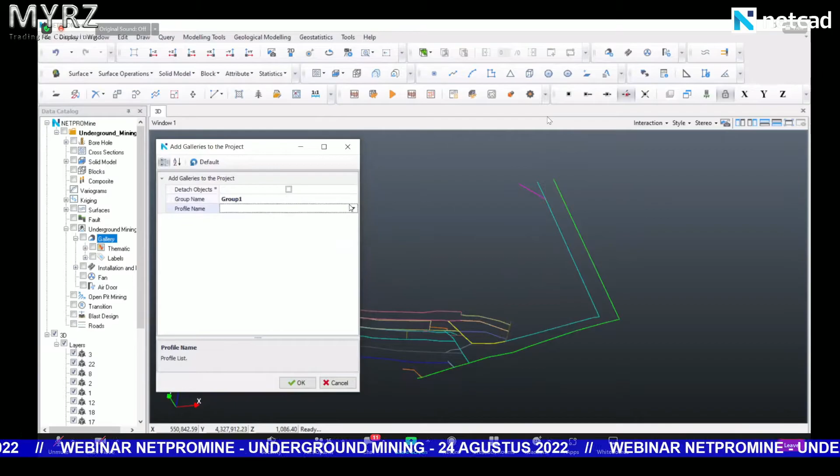I can select the data layer, or I can select by using a selection option from a 3D screen. So I said I'm going to make the selection in a 3D screen. So let's say that blue line I would like to add as a gallery. I select it and I right click. What's going to be its group? What's going to be its profile? Or maybe a T profile.

So when I open the galleries, check the galleries, I can see that I saved that line as a gallery. I can do that for all the rest of the lines as well. Like I said from the beginning, it's just line editing and line drawing, and then we can select the galleries to add under the gallery part, or we can freely design our galleries. We can add gallery profiles to the libraries, etc.

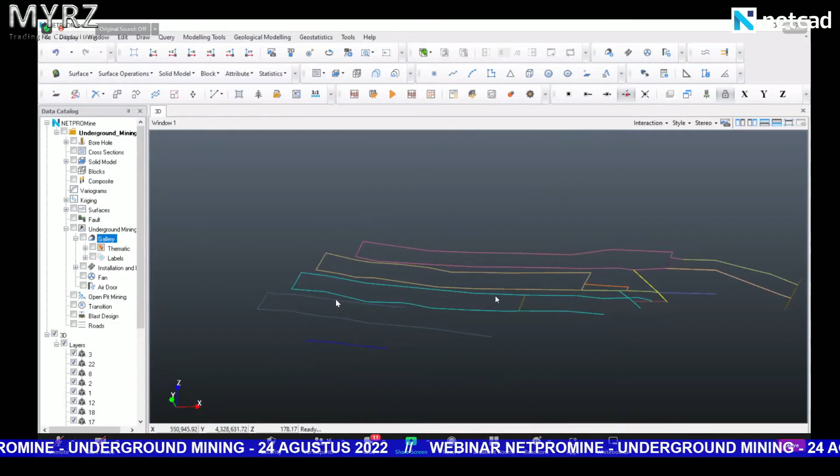So basically, these are the features. But there are a few more things I would also like to mention about the galleries. There are some other options that you can work on for the galleries in our software. So quickly, I would like to show you some.

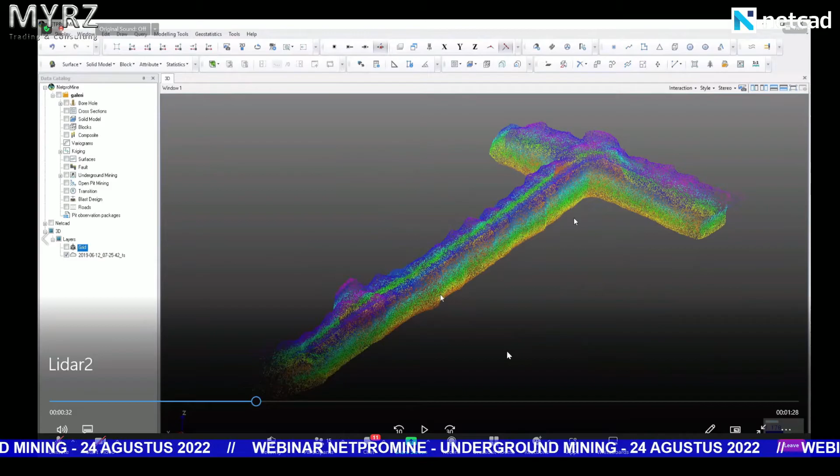So this one is LiDAR data that belongs to an underground gallery, and we add that to our software using elevation visualization. So I have a point cloud of an underground gallery, and by using that information, I can also create the point cloud gallery.

I'm selecting the layer where I'm adding the LiDAR information, and then I'm adding this model to the project. It uses those points and turns them into a solid model.

And I can check whatever is inside the underground gallery. So it's also an option that can be used for underground gallery designs.

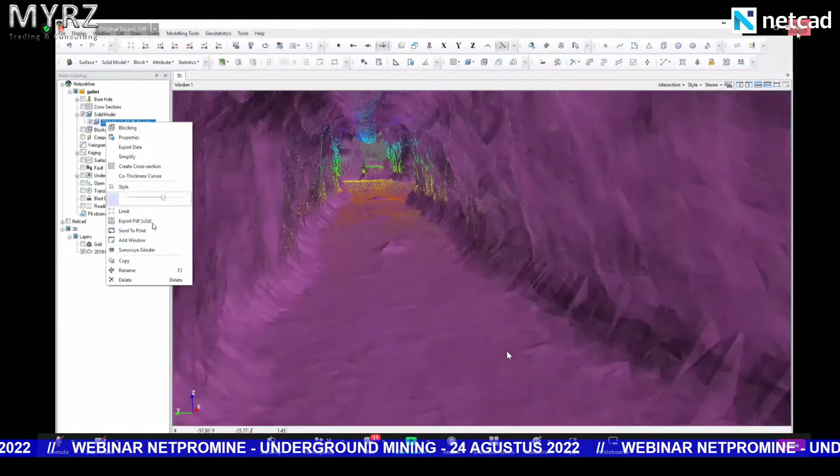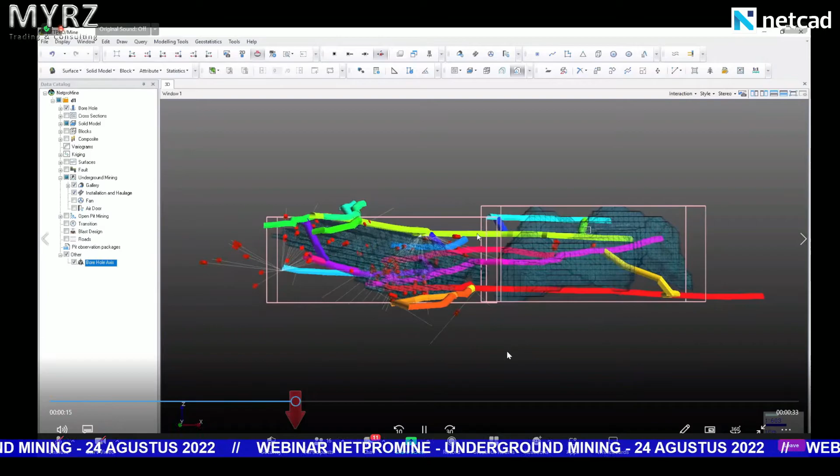One other thing I'd like to share: if we do a design around the geological model or around the block model, there will be some intersections between gallery profiles and the ore. So to get some information about that ore and the galleries, we can use the feature for gallery ore volume inside the gallery. We can select which galleries we would like to report.

Once we've made the selection, we can get reports about it, and the report shows us which gallery has ore volume inside. So let's say the total volume of the 1C gallery is 590, but it says 175 is ore, and the rest is waste. I also have a chart or graph that shows that information, so I can get that kind of information from the galleries as well.

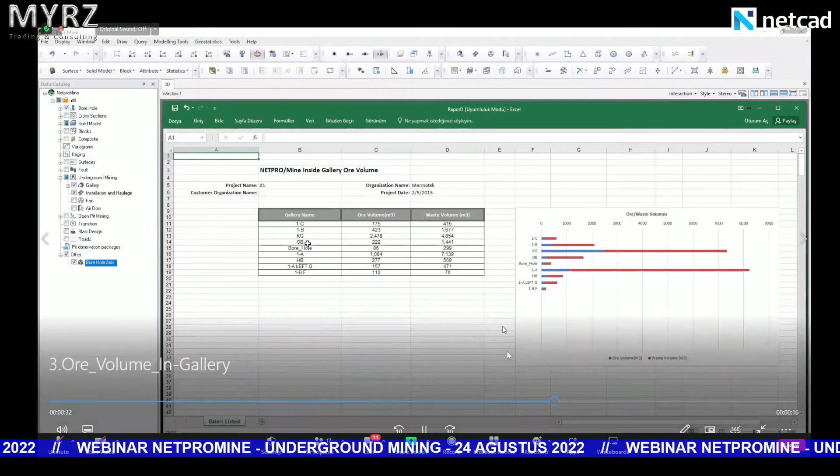Because I didn't do a design around the geological model, I couldn't use that feature, but it's also an option when we design the underground galleries properly around the block model or geological model.

Yeah. All right. I'm going to end the sharing.